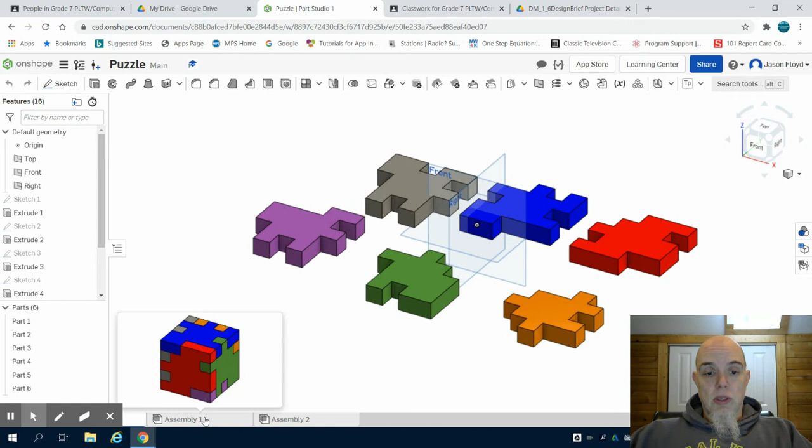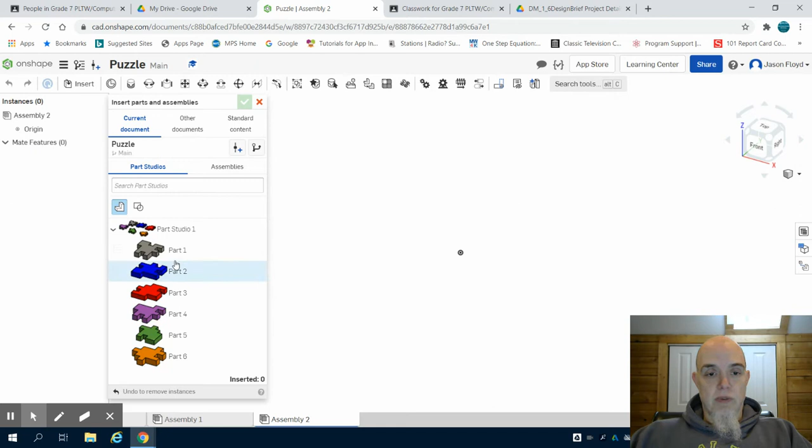So I'm going to come down to my assembly and insert my first piece. Now, the way I decided on what piece to insert is if I look at what they show me in this document, I see this piece that has a little L and has a square up top, and that's the piece I decided to bring in first, which is part 1. I'm going to click part 1 to lay that down, and I'm going to right click on it to fix it or pin it to my environment.

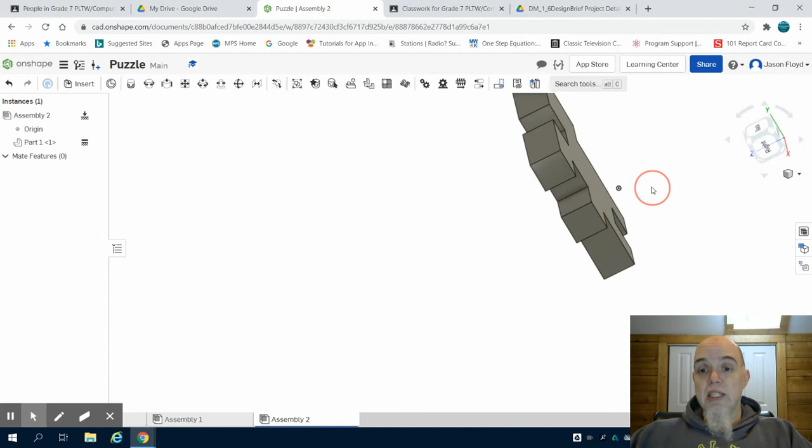Now, I'll be honest with you, when I did this my first time, it was extremely easy to get lost. So I'm going to show you how to get started, but I'm not going to go through the entire assembly for you. So I have that first part pinned, so I can't move that within my environment now. I'm going to go back to that diagram.

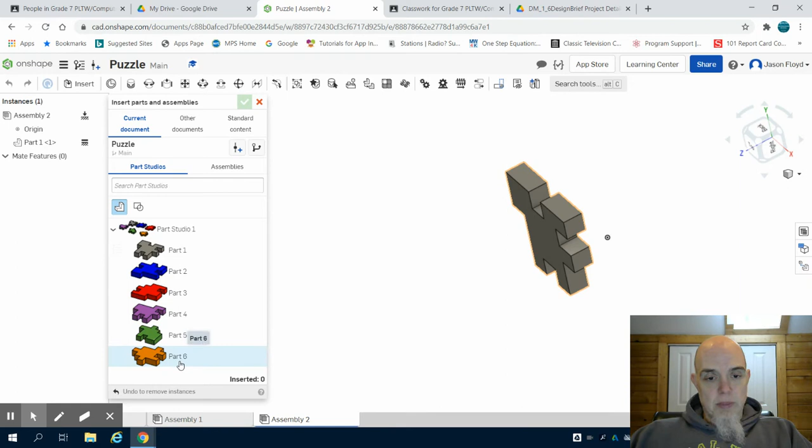What I can see is I have this top piece here. So I have 2 openings on the bottom, and I have, I don't know, 3, we'll call them pegs on the side. So as I go back to my assembly, I'm going to insert, and I'm going to locate that piece, and that is part 6. I'm going to bring part 6 in, green check mark to close out, and now I could use planar mates and constrain it on the X, Y, and Z axis. I found this project to work extremely well with fasten mates.

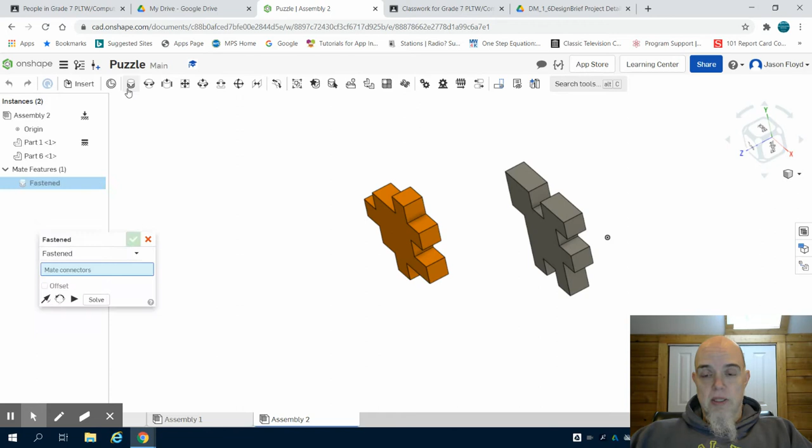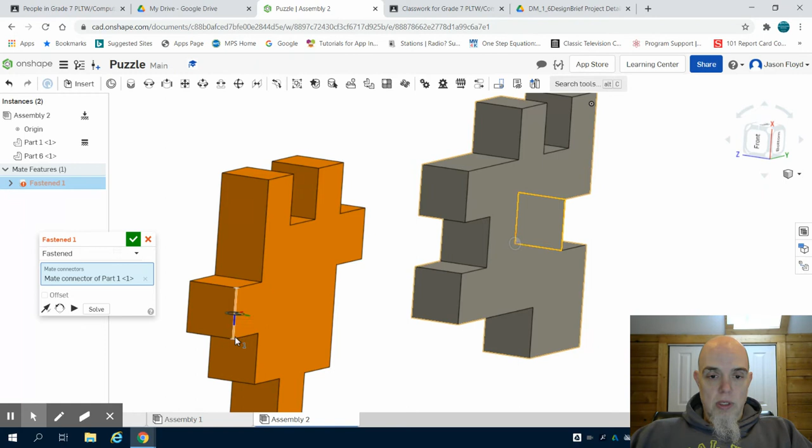And what I'm going to do is I'm going to fasten this corner. Right there. I'm going to grab that corner, fasten it. And what I want to fasten it to is this corner here. There we go. I'm going to reorientate myself. What you're going to notice is I'm going to have to use my flip tool here to reposition that.

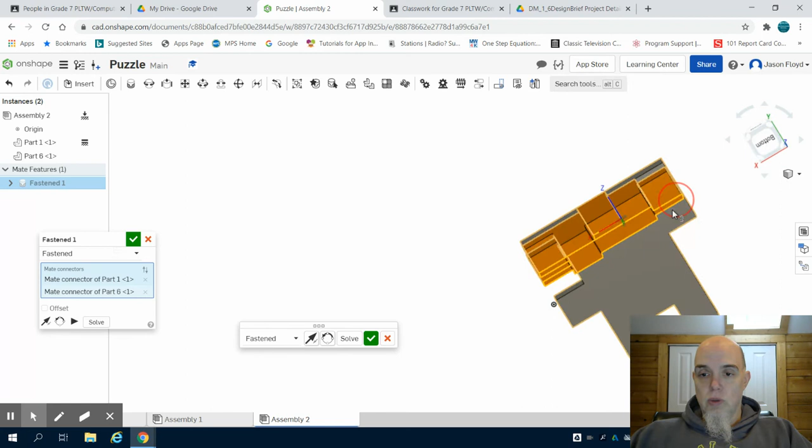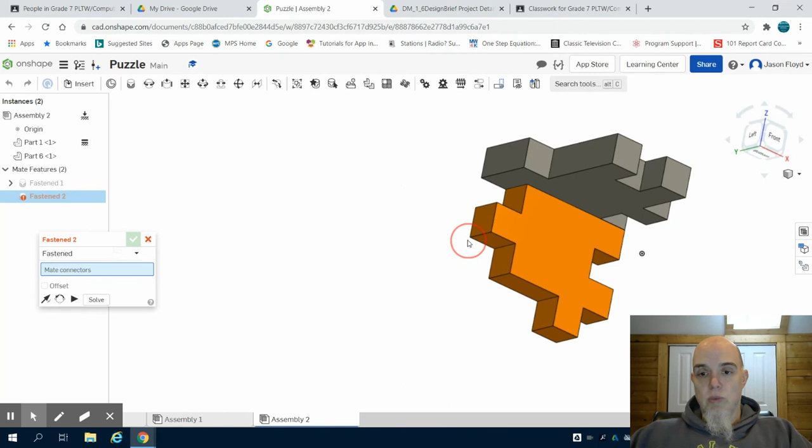So if I can look back to my cube, I can see that that piece is sitting in there nicely now. Clicking on my solve, and we can see how those 2 pieces match up from what we see here as we reorientate ourselves. So again, it's all about finding the right orientation to see that I have my large square here with this piece here.

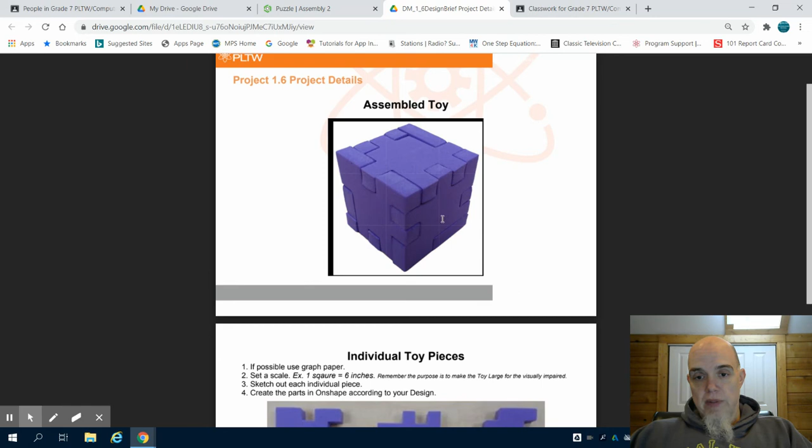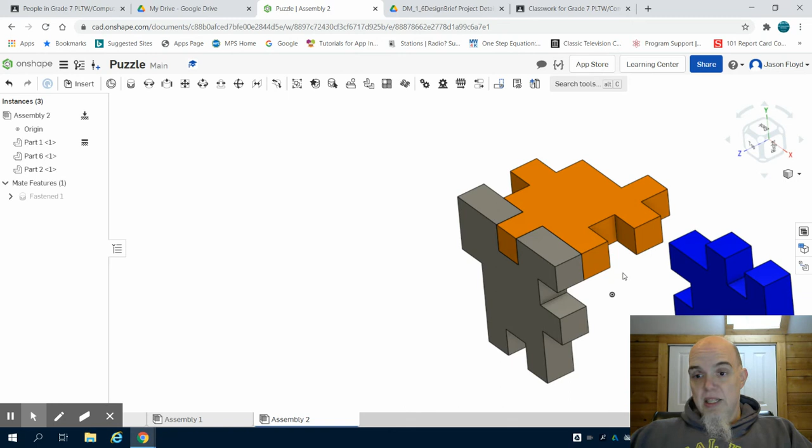Next, what I'm going to look at is going back to this. I can see I have this little U here, and I have this piece right here that I can fix into that little F portion. So as I go to insert, I believe that is my part 2. Yep. I'm going to lay that part 2. And I have a couple ways that I can constrain this now. I think the easiest is going to be constraining this to what looks like an F here. Again, I'm going to go to my fasten mate.

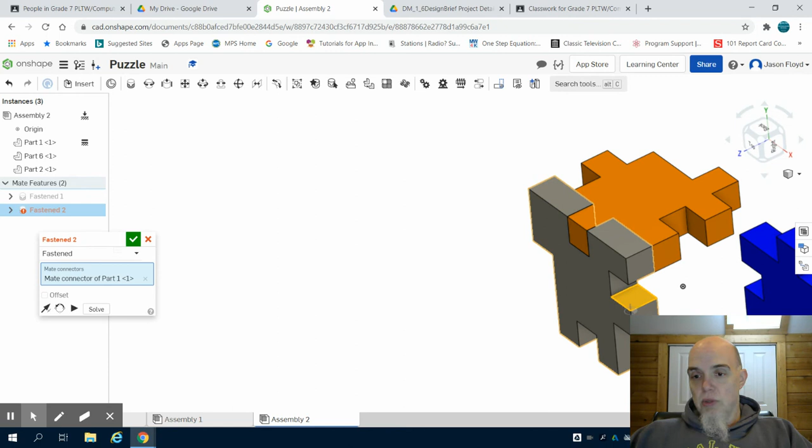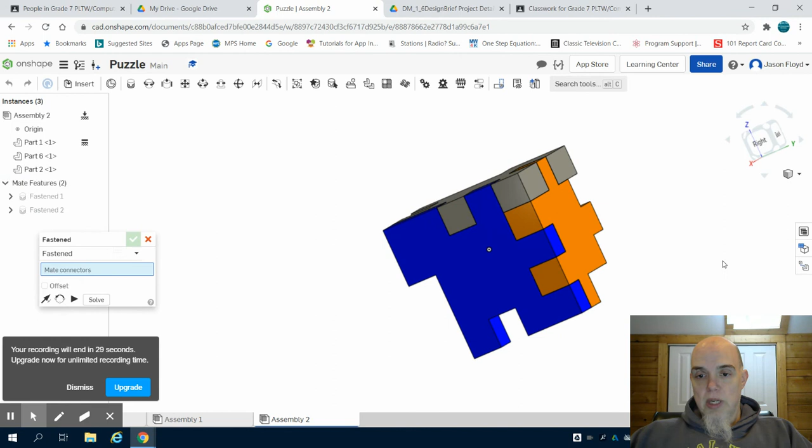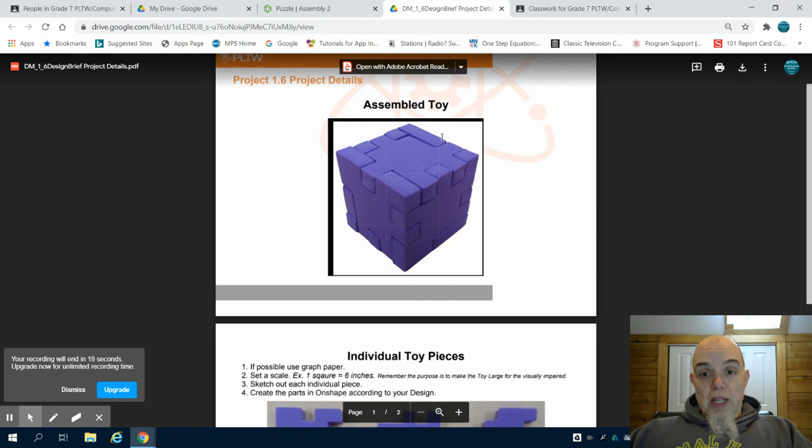I'm going to choose this top point, and that needs to line up with the bottom point here. Again, I'm going to gain perspective on this, and I'm going to have to rotate my piece, green check mark, and you're going to see that so far I have my first 3 pieces constrained together. By looking at this image here, you are able to bring in your following pieces.

That will be a challenge, but if you need help, please see me during office hours, and best of luck.